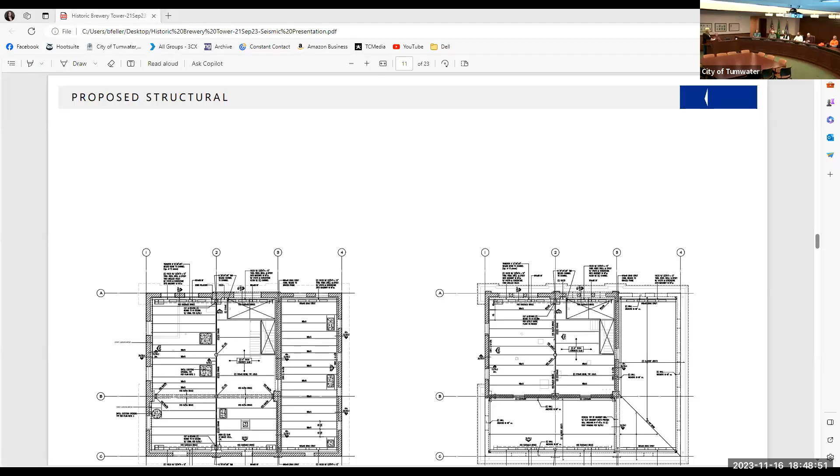I'm going to ask Jim Carey to come and show you a slideshow one more time. Will this be the third time this year? So we're going to go through it one last time and show you the plans, and then we'll be available for questions. And I'll come back and ask you to consider that certificate of appropriateness. So Jim Carey. Thank you, Ann, and thank you for having me here tonight. It's nice to be here in person.

This is I think the third time that we've done this presentation this year, and it is a presentation of phase 2, which is simply the seismic improvements to the building. I can tell you that we submitted the construction permit application and documents to the city in October, so just maybe a month ago. And that's with the city right now. And your approval is part of that application process. So let's jump back into the presentation here.

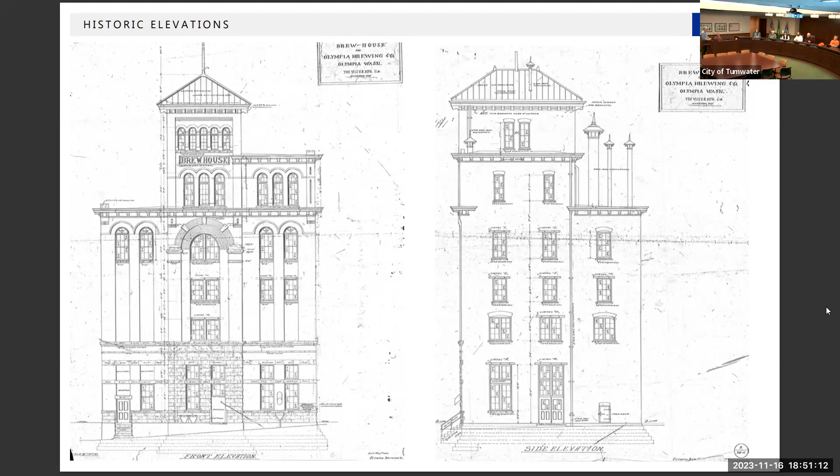You'll notice at the bottom, got a pointer? I do not. At the bottom of the drawing, you can see stepped footings. Those are the foundation for this heavy masonry and concrete building. And they anticipated that this building would be built either on substantial soils or on bedrock. And I imagine as they discussed through letters in the early 1900s, when they were describing this location, they anticipated a much stronger setting groundwork for this building.

These are more of those building section drawings. The architects in Milwaukee were brewery experts, so they anticipated the gravity brewing process, and these were part of those really awesome construction drawings that they produced. Once again, at the bottom, you can see these sort of pyramid-shaped foundations that they anticipated building and supporting the original structure.

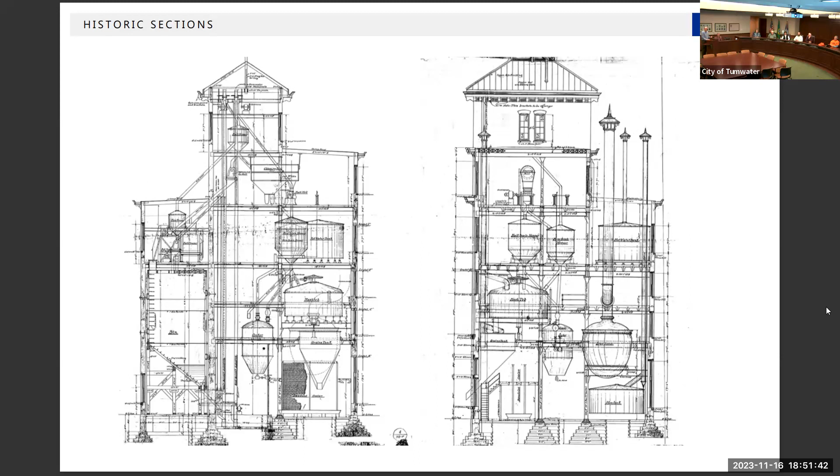These are illustrations of the building when we first started working on the project in 2014, which is actually when we first did the first study as part of the craft brewery project. And so this was the condition. I believe we took these photographs, for instance, the one in the upper right from a drone, showing the deterioration of the existing brick. What you see over that existing brick is a temporary roof structure that was put on to help keep water off of the brick and help it last a little bit longer until we did the masonry restoration project, which we finished in about 2019.

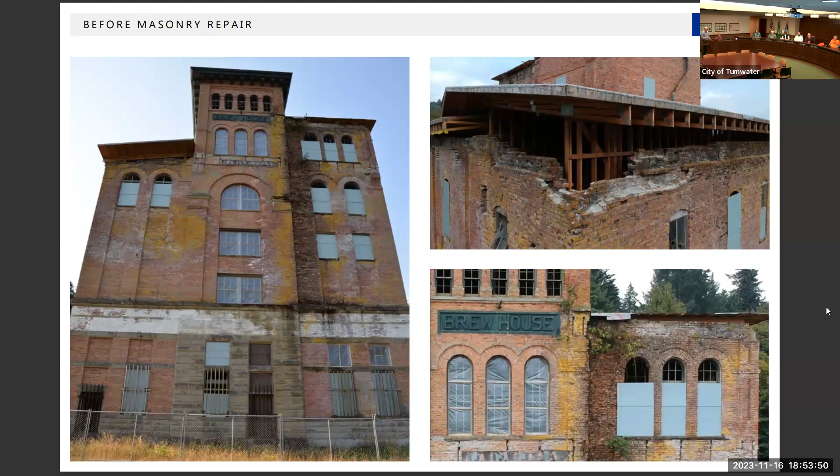Going back to those foundations. So this is a photograph on the left and in the middle of the structural engineer and me down in what is technically the crawl space beneath the structure. And the city of Tumwater was kind enough to pump out about 12 feet of water from this space so that we could climb down in there. You can see where the dark concrete stops, and that is the typical water table down at the brewery site. So they pumped out all the water and we looked at the structure underneath. We're pretty sure we were the first people down there since the building was built. The concrete was in great shape. It holds up underwater pretty well.

And the thing that we figured out in this process, and also digging through the documents, is that those original drawings that were anticipating spread footings didn't work in this location. The drawing on the right is actually a timber pile plan for supporting this heavy masonry structure down in the riverfront. What we imagine happened is that they didn't anticipate that they'd have groundwater problems. They dug a hole for the foundations, and at a certain point they just couldn't keep up with the water. As much as they dug and pumped, they couldn't get down far enough to hit bedrock. So they probably drove some piles to test, and found out the bedrock was about 12 feet below where they expected the spread footings to be.

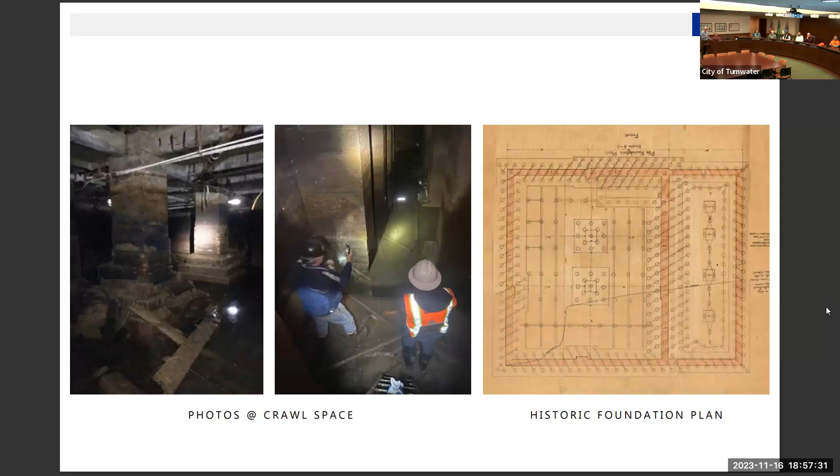And then there's actually going to be construction down in this space, down in the crawl space beneath the tower, as we support all the steel and concrete that goes up above it to support the tower for seismic improvements. So these are pretty small, but these show you the plans direct from the structural engineer's drawing. I'll go through these quickly and sort of illustrate what's happening here, and then we have a 3D drawing that illustrates it much more clearly.

The one on the left is called the structural foundation plan. That's actually the plan down in that crawl space. And in that location, there will be two things going on. They'll be installing micro piles, which are steel pipes that are driven with machinery down through the existing concrete. Those are driven until they hit bedrock, which is, like I said, about 12 feet below. And then they will be filled with concrete, capped.

And then those are tied into the existing foundation and also new foundation grade beams that will be installed down there. There'll be some that go straight down vertically, and those are for gravity loads. And then there'll be some that'll go at a 45-degree angle out from the foundation, and those will be more to support lateral loads so that the building is stable.

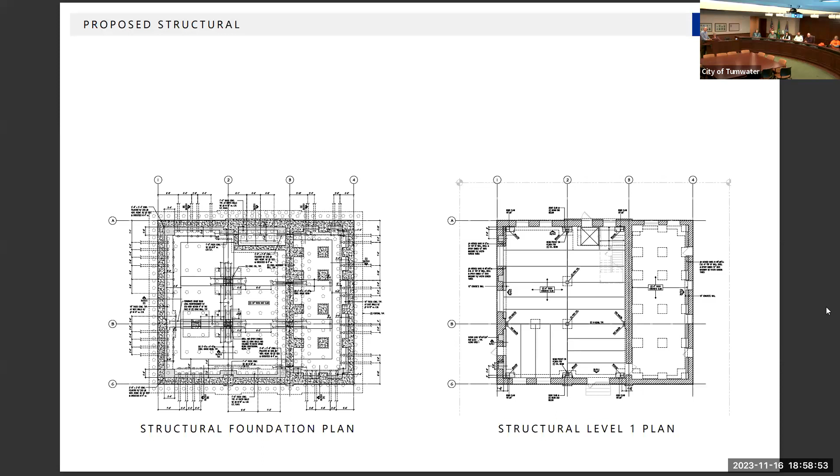Moving up through the plans, level 1 has new concrete walls on the east and west sides of that floor. As we move up, we're going to infill some of those large openings that were part of the brewery construction. So where there were large kettles, we need to fill those in with concrete and reinforcing steel to provide a much stronger diaphragm at each of those levels, deep in the lower levels of the building.

When we get to level 2, the concrete transitions to a steel frame. And so there's a steel frame that'll be on 2, 3, 4, 5, and 6, and all the way up to the top of the tower.

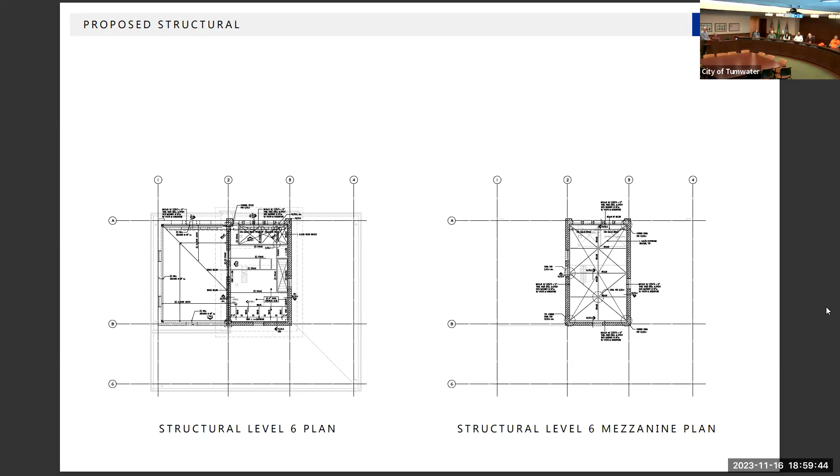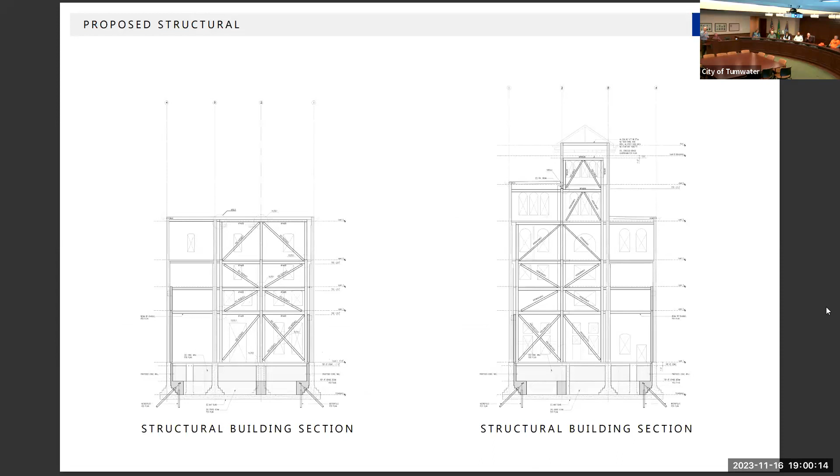These are more of the structural engineer's drawings. On the lower level, where you can actually see once again those pyramid shaped foundations, there will be concrete grade beams, some concrete walls that are supporting the existing concrete walls. And then as you move up, you'll see the diagonal framing. That's the steel that goes up through the building. And that steel transitions all the way up through those diagonals to transfer the loads from the top of the tower all the way back down to the new foundation supporting elements.

These are more of those structural drawings. This one on the left is looking west to show the ground floor concrete that is on that wall, and then the one on the right is looking east, and that's the concrete that's added almost all the way up the wall of what is sort of the grain room on that east side.

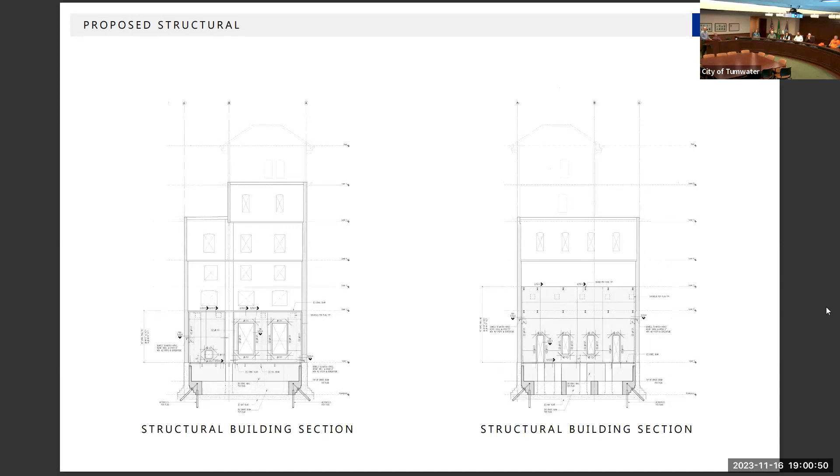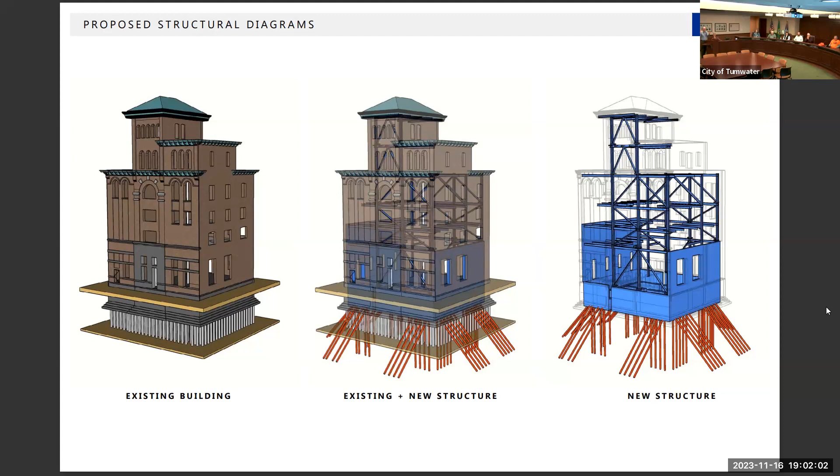The middle drawing shows the combination of the building and the new structure. And then the drawing on the right, the red is the new piles; the vertical ones are getting the vertical load, and then the diagonal ones are stabilizing the building and holding it in place in the lateral load. The blue is new concrete. That's reinforced concrete on the east and west walls. And then below, that's new concrete down in that crawl space.

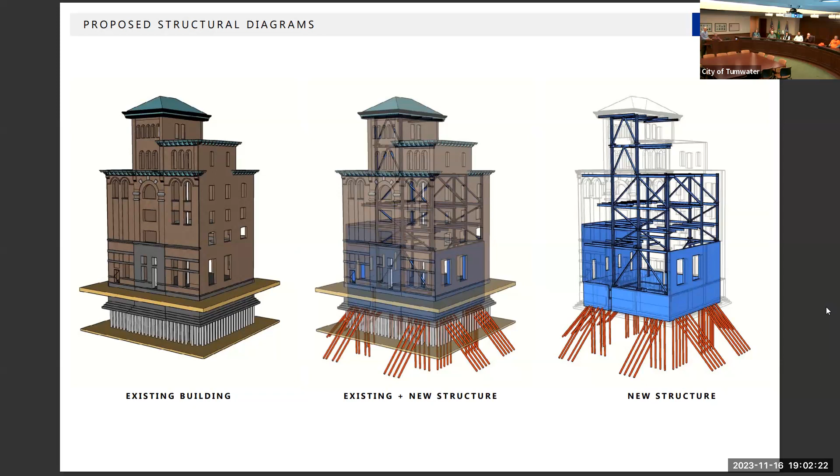And then you can see the framework of steel in blue climbing all the way up to the top of the tower. So the middle drawing is a composite of the two. The one on the right illustrates the new structure. And then these next 4 drawings, I think we corrected these. They show the last meeting. I think these might have been labeled incorrectly, but these show the interior elevation.

So a section drawing through the building, looking at that interior wall and the new structure that's imposed on that wall. And it's a little unfortunate that the north side is the one that's the iconic view of the building where you get the full tower and it's the full height. Because that's the full height location, that's the one where we have to take the steel all the way up to grab the structure at the top of the building. So that's the north side.

This is looking west towards the river. Once again, we've got new concrete at the crawl space level and at the first level. This is looking south back towards the hill with concrete at the crawl space level and then steel climbing up from there. And then this is looking east towards the rest of the brewery property. And we have quite a bit more concrete in the grain room and not as much steel. There's steel coming at us in this drawing, pulling that new concrete and tying it to the new framework that's going up through the middle of the building up to the top of the tower.

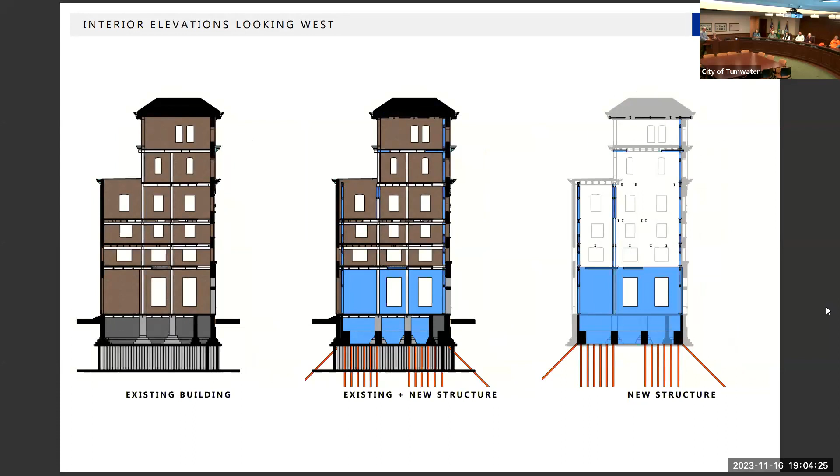Can you go back to the west one? Yes. So is that the one you see from the freeway? Was that the north side? So you see the north side from the freeway. Well, yeah, so the main view, I always imagine coming down the hill from the Capitol and you're driving and then you can look off. That's the main view on the left. Yeah. That's it there. This is the one. This is the inside of that view. So the interior elevation is the view looking at the inside of the wall, looking north. So this is the back side of the main view of the building.

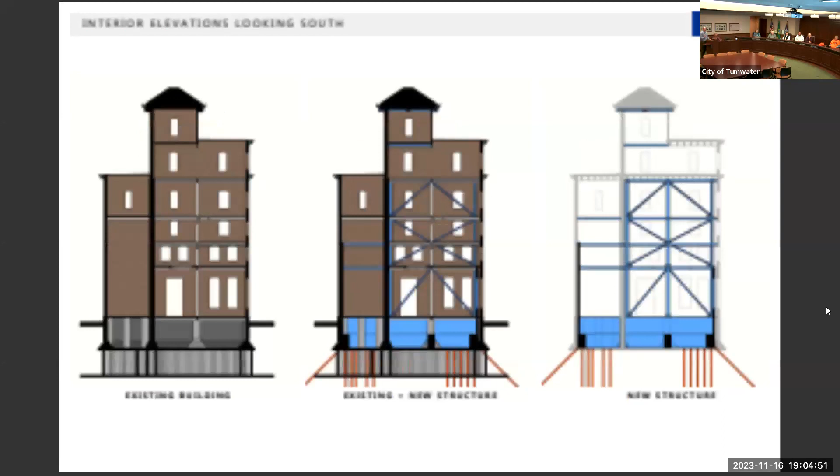And so that's the scope that we're planning to do as part of this project. It's the scope that is in the construction permit documents that we provided to the city. There's about 400 pages of structural calculations as part of that with diagrams, and it's interesting to a structural engineer. But it's pretty impressive; it's a tall, heavy building, and the seismic forces. I think in a previous presentation we've shown the video. A lot of those forces live up high, and the top of the building really moves quite a bit in a seismic event.

And the work that we saw when we did the masonry improvements was that the majority of the damage was really high, and the bottom of the building's sound, but when the earthquake forces are in that area, it really accelerates as it goes up, which is consistent. Concrete on the inside would be visible from the inside, I assume. Correct. The steel beams crisscrossing and what have you would also be visible from the inside. Correct. Okay. And just to be clear, there are steel beams that cross in front of windows as well.

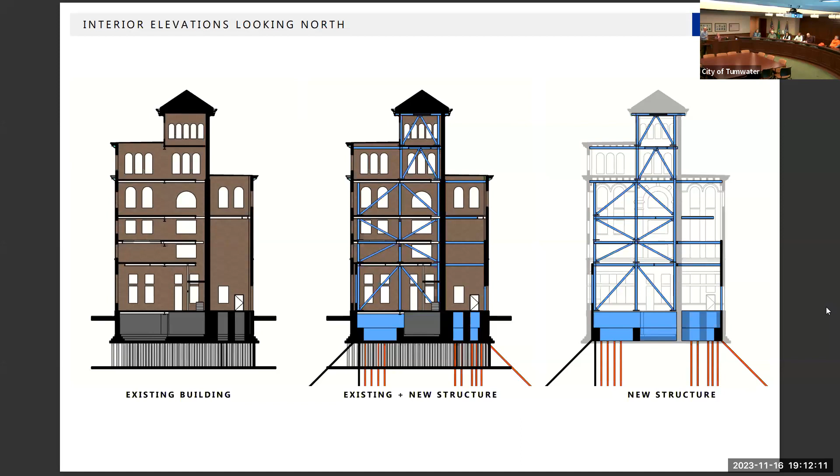Can you give some dimension to the discussion with the building official regarding potential? So let me move forward in this presentation. And I'll tell you how far we got, because we didn't want to be presumptuous. We have not been hired to design that. But in order to do this scope, we wanted to make sure that we didn't put something in the way of future work. So we had to understand enough about how the building would be potentially used to make good decisions about how we did the seismic work inside.

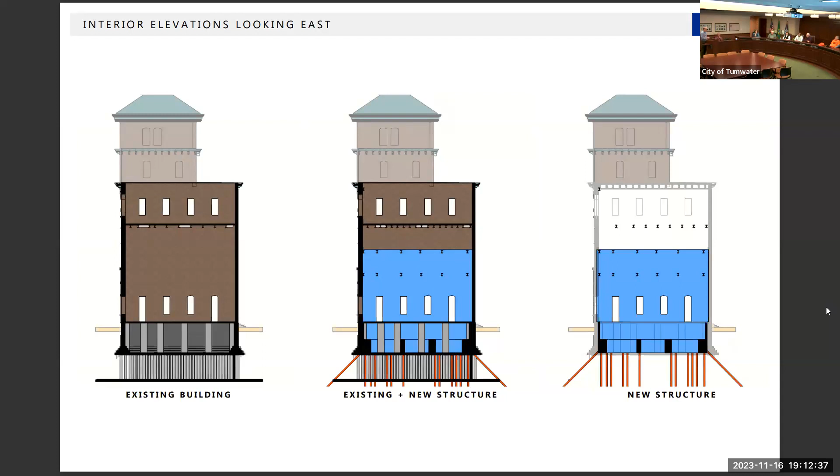So, double check. Yes, so these drawings were part of the drawings that we shared with Al to discuss how the building might be used. And because the potential use is likely public access, that means assembly uses. So assembly is an occupancy category in the building code where we assume people are awake and doing things, and they're in a group. And so there are more of them.

So the building code says that there are so many square feet per person, and that's our occupant load. And so that describes to us how many stairs we have, how many exits, whether we have public facilities in the building. So we took the bare minimum of public facilities and exits. We have 2 exits from each floor. We've got public restrooms in the building, and we added an elevator to the floor plan of this building that was meant for Gravity Brewing, and we filled it up.

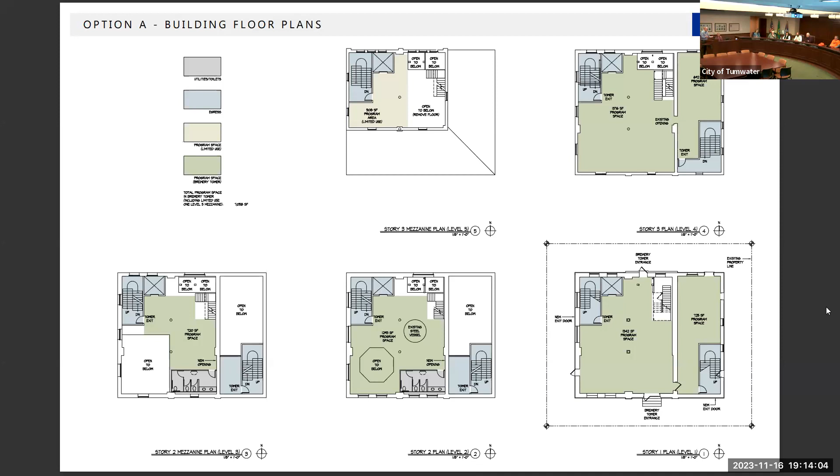So basically the building is full of nothing. You've got no space inside other than your ability to enter it, climb up and down, and use the bathroom. And there was very little space left over. And so we drew this drawing to illustrate that. Yeah. What we anticipated instead was pulling the vertical circulation out of the building. So keeping one stair in the building where we have good access up through the middle of the building, and then pulling the elevator and the second stair out of the building.

So what you're looking at is north is up in this drawing. We've got the floor plan of the tower on the left with a stair in blue through the green tower, and then a stair and an elevator outside the building, probably out of a steel structure that climbs up the outside of the building. And that would be connected to the building to the east, which is that concrete building with the metal roof that's pretty cool and could potentially be a restaurant or an assembly space as well.

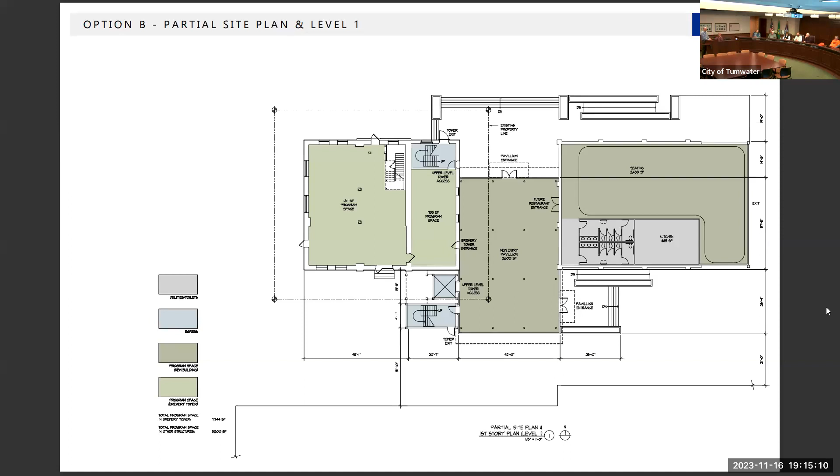And what this does is it opens up the brewery tower to having floor space, whether it's museum space, assembly space. It's useful again, as opposed to having just basically a building of facilities. So we kept going just far enough to sort of vet this plan in our heads. And I think the second floor is down at the bottom that shows the roofs of the concrete and steel building on the right, a connection building, sort of a pavilion building that connects the two, a low building, and then the brewery tower gets to be on its own on the left with a circulation plan, and the open spaces are in green on these drawings.

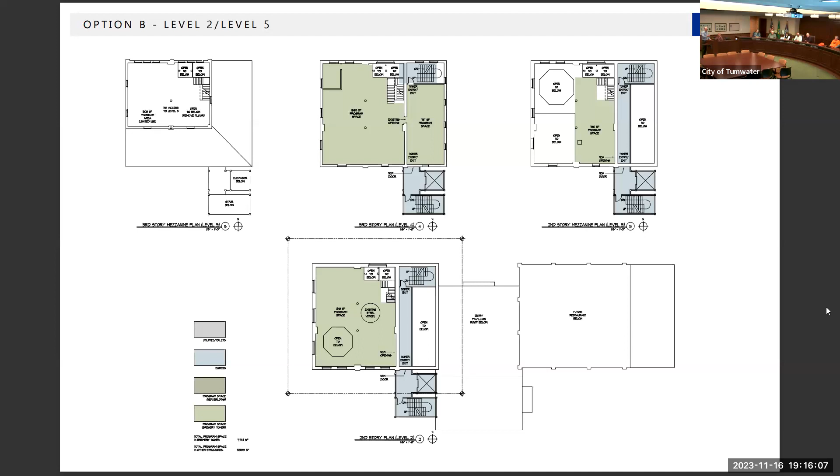As you climb up through the building, we assume that we're adding fire sprinklers, that there'll be alarms for fire, all the requirements for the current building code in this, and it'll have windows and doors and gutters and all those fun things too. So we kept going. Once again, just to look at how this might go together. So the brewery tower, if we're looking at the bottom here, the brewery tower is on the right. There would be some open building that connects the two. Maybe there's a terrace towards Capitol Lake or whatever that becomes.

And then the building on the left could be restored, the concrete building and steel, and that seems to be in pretty good shape as well. And that could be put together, and you would have the start to a place to go down at the waterfront. Makes a pretty big Starbucks. I think that's where we stopped. So you've mentioned a couple of theoretical uses. You mentioned a museum, assembly space.

Is there not some section of the building that is open all the way from the bottom, from grade up to what level? So it goes up to 4 or 5. It's actually from below grade, because that was the material elevator for the equipment that had to go up to the top. And the grain actually took its own path. Water took its own path. But yeah, so there is a spot that goes all the way up through the building to the 4th. How wide is that? It's not very big. It's big enough for the material elevator that was in there, but it's not big enough for a current elevator.

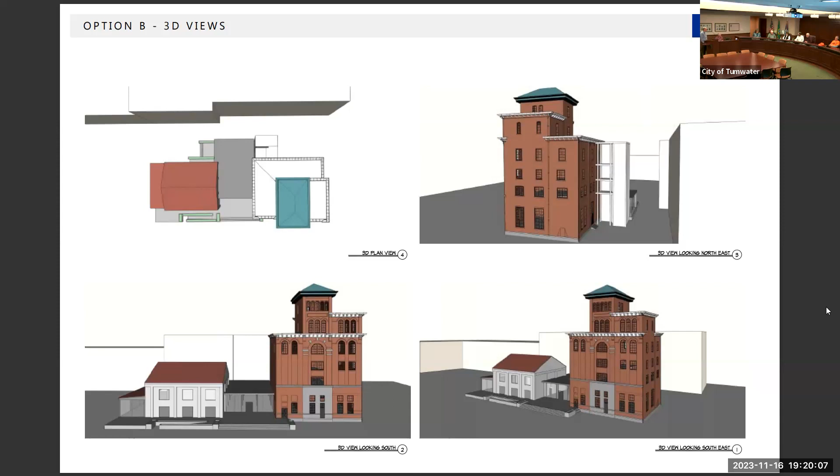So, Mr. Chair, do you need a motion to approve the certificate? If there are no other questions, I would entertain a motion. I so moved. Second. And did you want to add something before we continue? Please continue. I'm just going to wait and tell you what's going to happen next after you. Oh, okay. We have a motion on the certificate of appropriateness application for phase two. It's been moved and seconded. Is there any further discussion on the motion?

I'd just like to say that the internal structure is a very elegant plan. I just want to say thank you to Jim for coming back and presenting to us one more time so succinctly. And I'm looking forward to phase three, where we can really get into flagpoles and signs and the exterior lighting and zip lines. The zip line, climbing walls. Any other discussion, comments? Okay, all in favor of the motion, say aye. Aye. Aye. Opposed? Thank you.

And again, it's nice to have you here in person, but you always look good on Zoom as well. I move we adjourn. No, cannot accept that yet. You got a yellow flag thrown on that one.